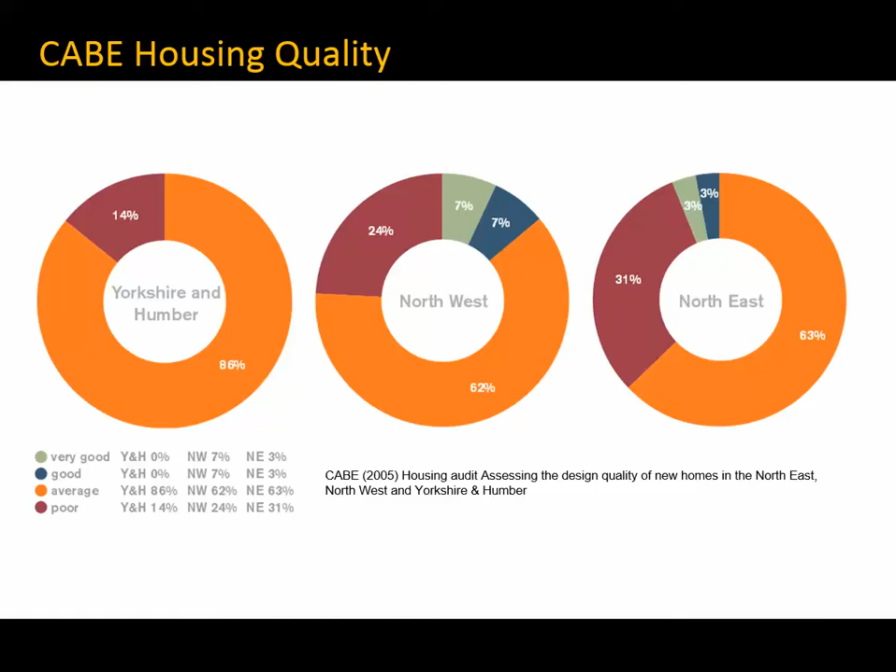But the problems with the UK housing industry are a lot more substantial than simply the quality of the design. What we find is that UK homes are now the smallest in Europe. And the reason for that is because of the way that speculative house building projects have been developed over time. So you're not going to get the space that you really require.

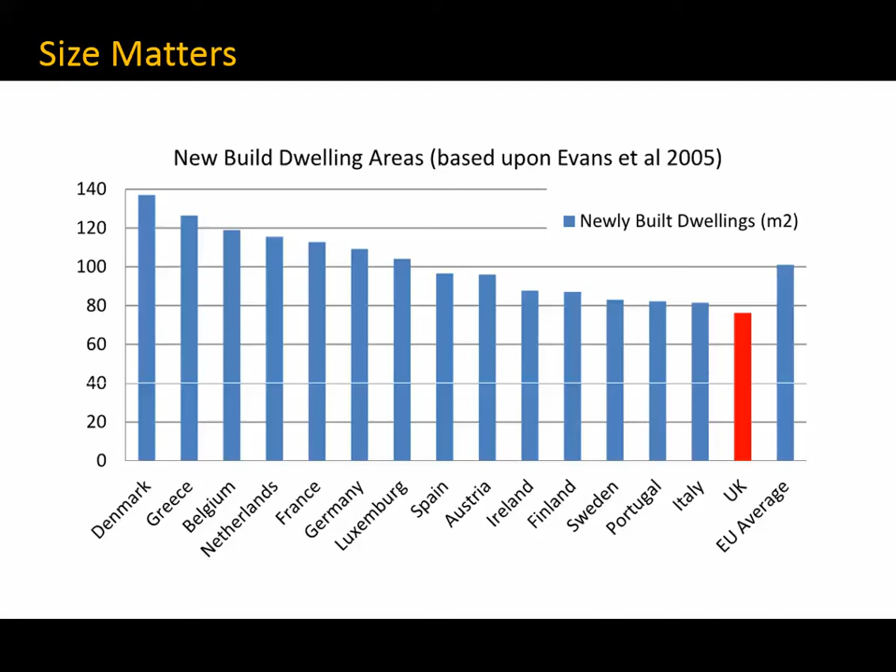So the average dwelling size across Europe is around about 100 square metres, and in the UK we're talking of around about 75 square metres. So it's really quite impoverished. We've effectively lost a very good room or a couple of rooms from a UK home these days.

And then if we start to think about the health and well-being that we'd expect from a home, the University of Exeter medical school have written a research paper. They've looked at 700 new properties and found that whilst the UK's got one of the highest asthma rates in the world, the new homes themselves, if poorly ventilated, are also likely to increase people's exposure to other biological, chemical and physical contaminants. So we haven't got healthy homes that are getting constructed, and so it raises a lot of questions about what we need to do in that kind of context.

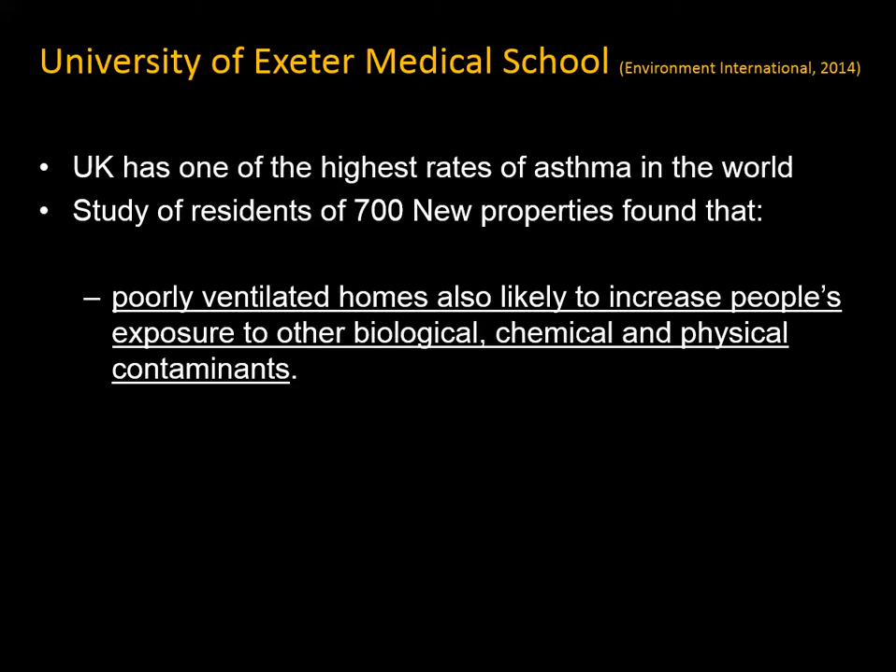To make things a little bit more clear, there was a study done by the Technology Strategy Board that examined different ventilation strategies throughout the UK that are all supported by building regulations. Now, behind the grey, you can see some blue and red lines. What we do in modern homes often is install trickle vents. So these are the little vents above windows, still within the frame. They're there to provide the fresh air.

Now, what happens is people go and close those vents because they start to feel cold drafts. So it's understandable behavioural stuff, but the result of that, according to the research by Sterling Howieson, is that an airtight home with trickle vents is likely to result in a more toxic and hazardous indoor environment, with concurrent and significant long-term and insidious impacts upon public health. So in his view, the methodology underpinning the current regulations cannot be considered creditable. So there's some major issues with that ventilation strategy.

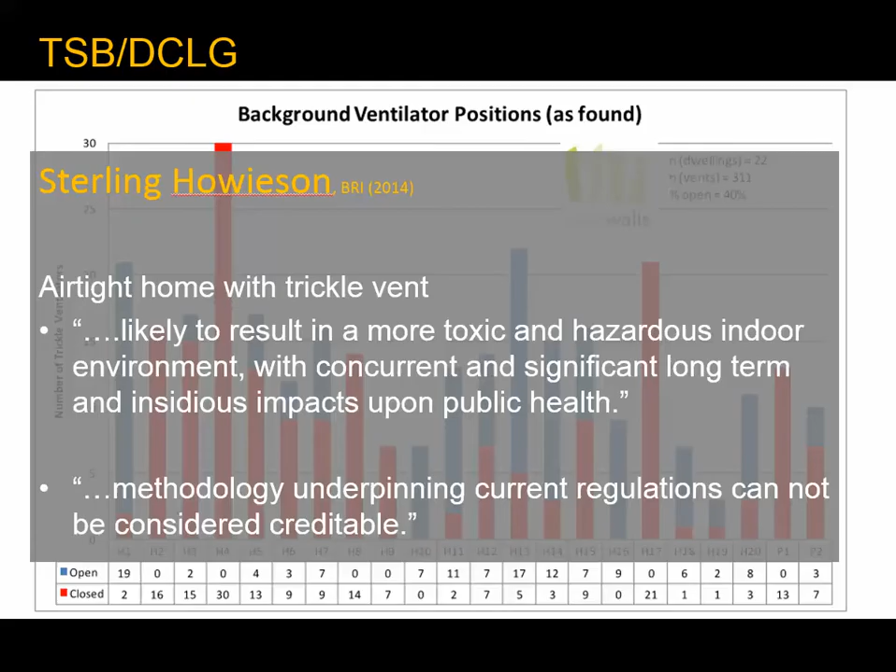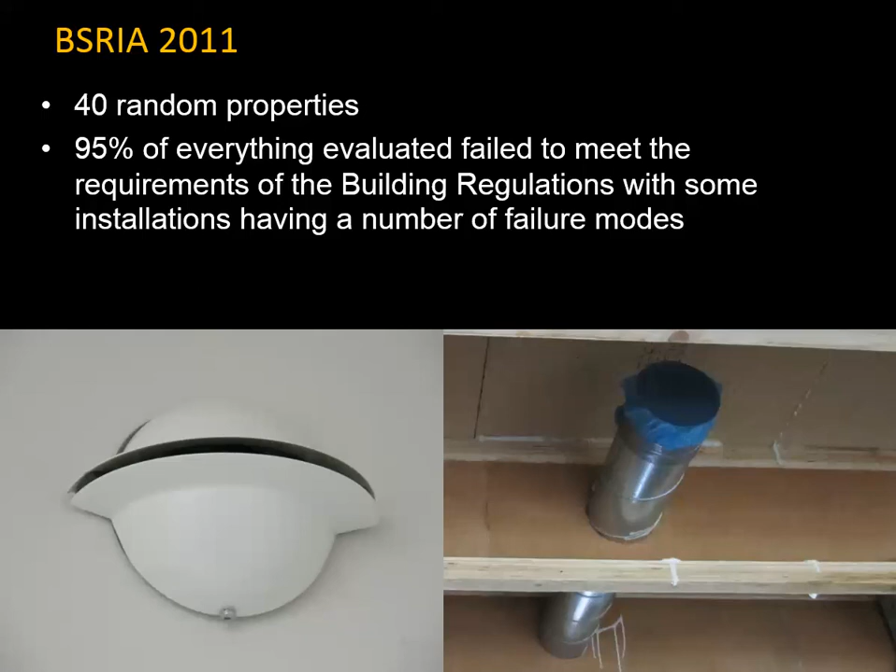So what are the alternatives? Well, with the building regulations being as they are, there's also mechanical ventilation options available. Now, what the studies are showing there, BSRIA, as an industry organisation, they studied 40 homes at random, and they found that 95% of all of the properties that they evaluated actually failed to meet the building regulations, some homes for a number of reasons. So there's some major issues within the construction industry in that regard.

So there's some research that I did with Jack Harvie-Clark from Apex Acoustics. We did a literature review of over 1,000 homes that had been covered in various different academic papers, and what we found was that there's a just phenomenal number of homes, mechanically ventilated homes, that have got acoustic problems, noise from the fans. They don't have attenuators, which are a bit like a car exhaust, which help keep the breakout noise down, and also crosstalk attenuation, so that reduces the amount of breakout sound between rooms. And so that's a major issue.

And then we also found that the UK building regulations permit 30 dBA as a noise level. Now, what we're finding is that that is not adequate. The research that we did, we identified some research that's showing that really this will result in around about 30% of people being dissatisfied. So that means more or less 1 in 3 people will be complaining about the noise. And when people complain about the noise, they do one of 2 things. They either switch the ventilation system off, or they switch the ventilation system down.

And therefore, bang goes your indoor air quality. And if you lose your indoor air quality, then this can mean that you can start to again have greater incidence of asthma, poor health, and the likes can start to ensue from that. So it can be hugely problematic.

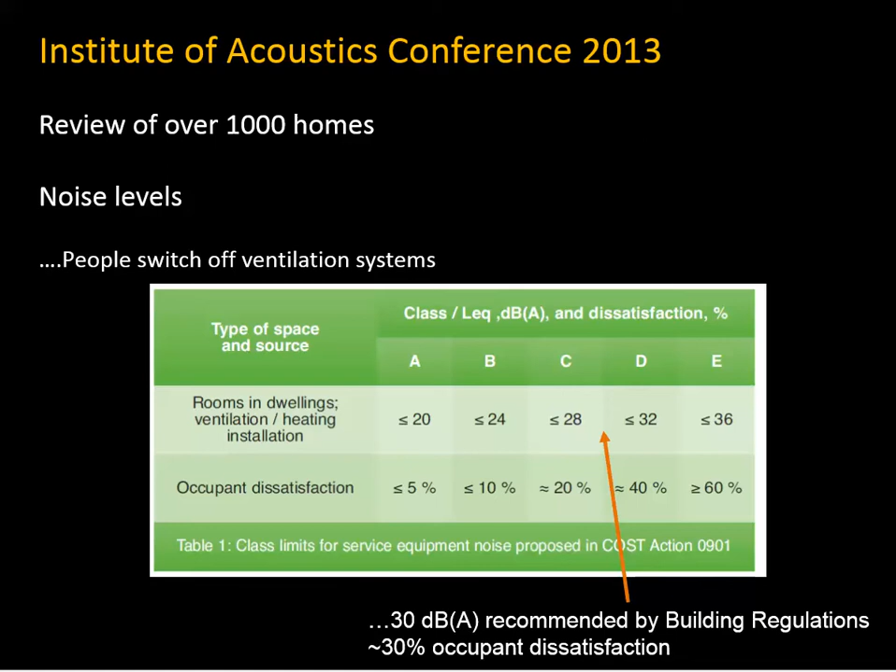And then if we start to look at some studies that have been done by Leeds Metropolitan University over the last 20 years or so, I should say that Leeds Met are now known as Leeds Beckett University. What you can see here is that the predicted performance in blue, so this is the theoretical performance, this is the one that building regulations says you should achieve. If you've got the blue line, then you've at different points in time satisfied the building regs or the design standards that you are seeking to achieve.

And then there's the measured performance, and you can see in all cases, in fact, that there is a difference between the theoretical and the measured performance, in some cases ranging from 30 to 70%. But only on the right-hand side will you notice that there are 2 properties, designed to use very little energy, and there's actually a very small gap between the 2. Those are properties that were designed in Houghton-le-Spring, and they were projects that I was involved with. Now, the reason that that difference is there is because we're actually within the measurement error of the co-heating tests. So they are some of the most successful low energy projects in the UK.

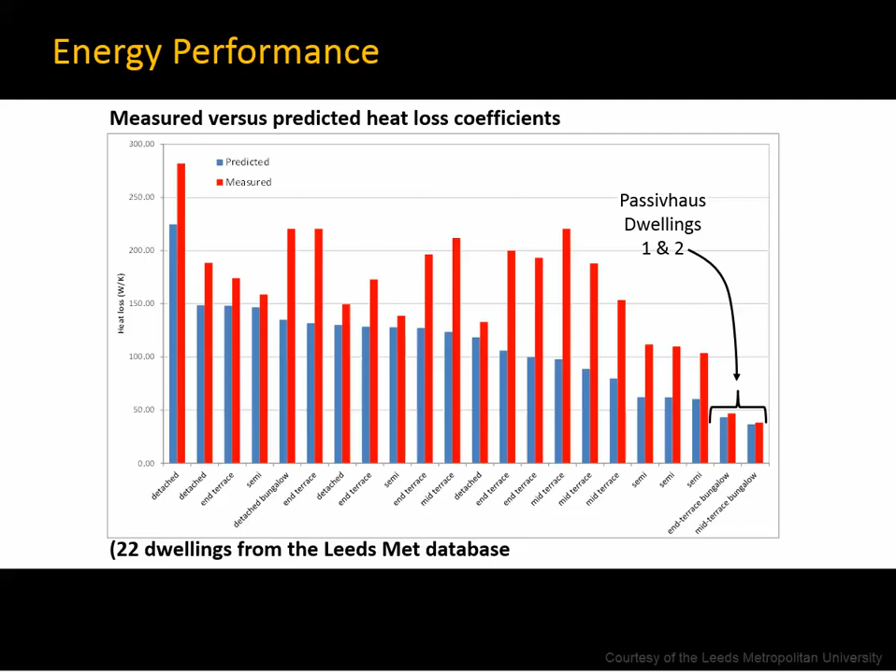So who am I? Who is Mark Siddall? Well, after having left school at 16, I trained to become an architectural technologist, and then I moved up to Newcastle from Ormskirk in Lancashire, and I went on and trained to become an architect. And then I've worked in a number of different architectural practices in the northeast and produced a number of different projects, all of which have been quite technical of their type. So I've been involved with Grade 2 listed buildings, with schools, with laboratory buildings and the likes.

And then in 2006 I started to get involved with low energy design, because I became more aware of the failures of the UK construction industry. And since then I've been involved with some of the lowest energy refurbishment and low energy new builds. I've been involved with writing a number of papers and articles, and I've contributed to books because of the kind of work that I've been involved with. I also deliver training to fellow professionals as well as to students at universities.

I'm a member of the RIBA, the ARB, and Constructing Excellence. I'm a technical advisor to the Passivhaus Trust and a trustee to the AECB, which is the Association for Environment Conscious Building.

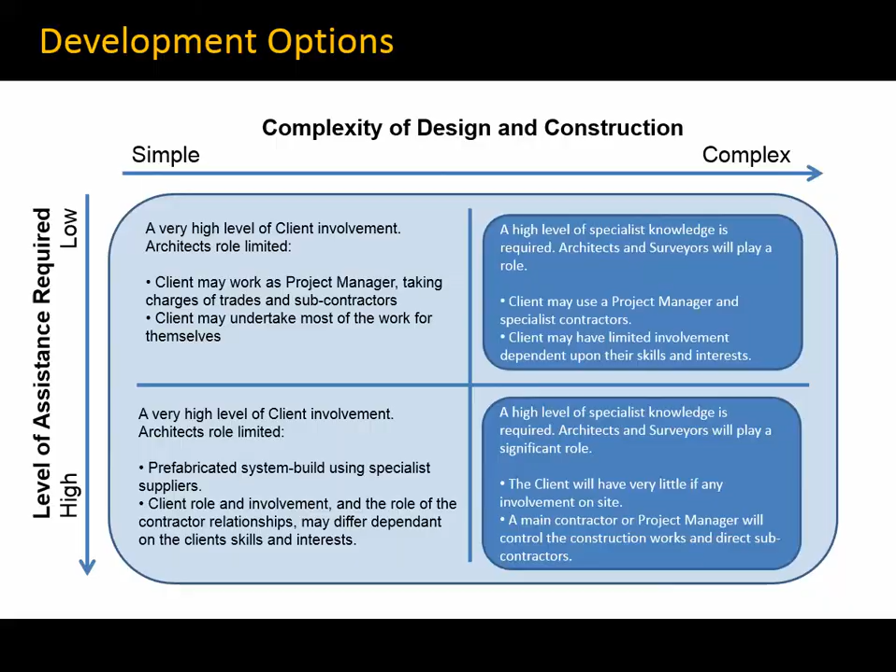Now, the kinds of projects that I'm working on are not so much the simple ones. We're talking about more complex projects, which are highlighted here in the darker blue. You can come back to this as time goes on, just pause the video. But basically, looking at more complex projects that are more demanding, whether it's because they are technically demanding or because the clients don't want to get as deeply embroiled in the actual construction processes themselves. That's where I'm ideally working, though of course I can provide architectural support to all projects where there's less design input required.

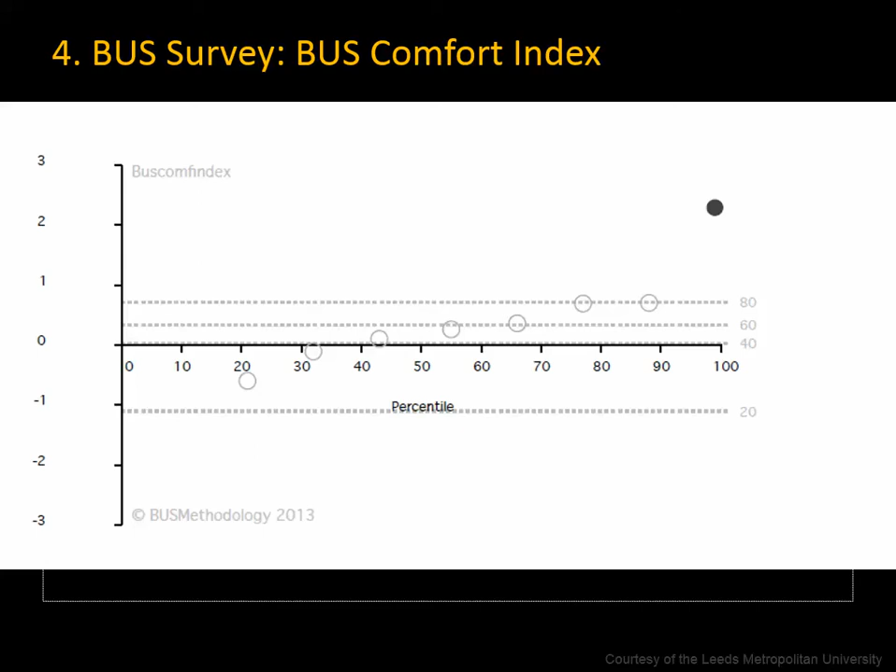In this graph, the little grey circles with the white hollow core are other residential projects of similar size to Racecourse that have been kept within the database. That really dark black dot heading towards the upper right hand corner, that's Racecourse. So we can see how it compares with regard to comfort and the levels of satisfaction people are experiencing with thermal comfort, noise and the like.

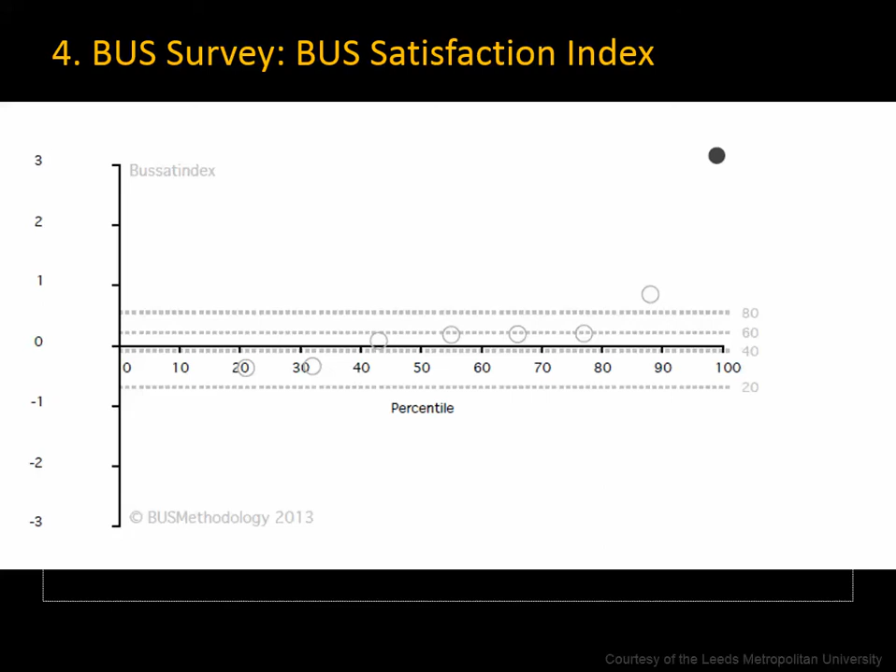And then we've also got the satisfaction index. This is also thinking about aesthetics and space and the location of the properties with regard to getting to amenities and things like that. And again, you can see that the satisfaction of everybody is just phenomenal. Racecourse just completely conquers everything else that's out there.

But it's not just that, the ventilation has also been studied very closely. Leeds Metropolitan University measured the airflows and found that they were the first houses they'd ever found that actually performed as predicted. So it's not just for energy, it's for ventilation.

There are other studies produced more recently by the Technology Strategy Board showing that Code for Sustainable Homes and Building Regulations study buildings are not performing as you'd expect. Around 81% of them are failing to perform in accordance with the building regulations. Meanwhile, these ultra low energy projects, the passive house projects that I do and other people are now doing in the UK, about 95% of those are performing pretty much as you predict. So you can have a lot more confidence with that kind of design standard, because it is the world's leading design standard.

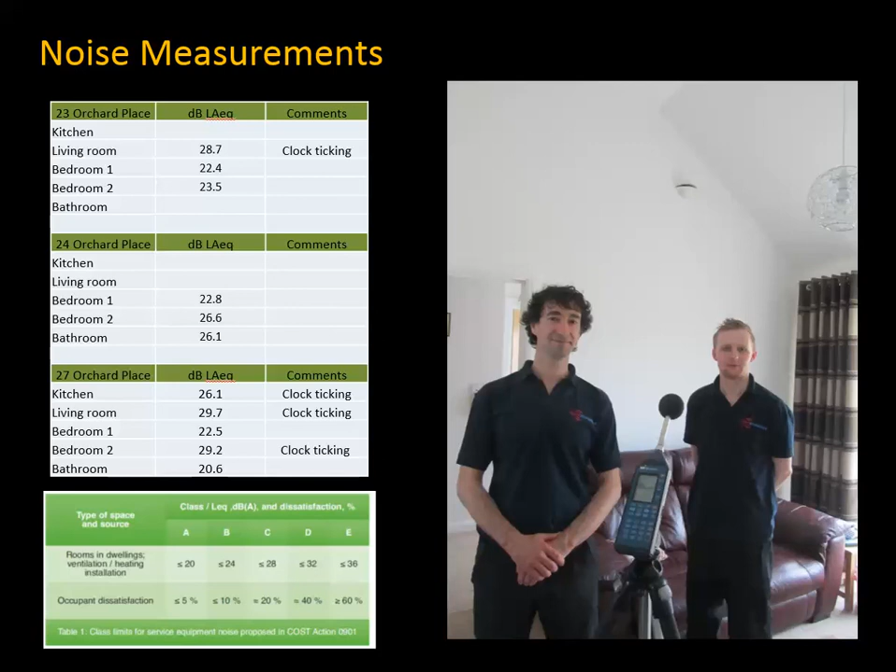Now, Jack Harvey-Clark, who I'd written that research paper with, went back to Racecourse and undertook some measurements in 3 properties. What we found was that the noise levels were very good indeed. There was a very high level of satisfaction. There were no complaints from the occupants, and the loudest things in the rooms were the ticking of the clocks. So we know the design was done correctly, and we're very pleased with the performance there.

In fact, we've got some feedback from residents. This is one anonymised resident: the bungalows helped enormously health-wise. The clean, constant, fresh air has helped with my breathing as I suffer from heart problems and asthma. Also, getting around the bungalow is a great help to my mobility, back problems, knee and hip problems. So some really positive responses from a person that's been in a very challenging situation before that.

And some feedback from Alan Thompson from Gentoo Construction. Alan was kind enough to say that my technical knowledge of low carbon design and building performance is breathtaking.

And importantly for him, I also had an eye on what it would take to construct the buildings in an appropriate way, because they were quite groundbreaking at the time. They were the largest passive house development in 2011. So he's got no hesitation in recommending me, which is really, really kind of him.

Very nice testimonial there. And then there was Wolfgang Feist, who was the inventor of the passive house standard, which, as I say, is the world's leading energy performance standard. He says Mark is one of the pioneers that introduced passive house to the UK. His experience and ongoing research into building performance makes him one of the UK's most skilled and knowledgeable passive house architects. I've no doubt that Mark Siddall's buildings also offer an economical and attractive solution to investors. So some really fantastic feedback there.